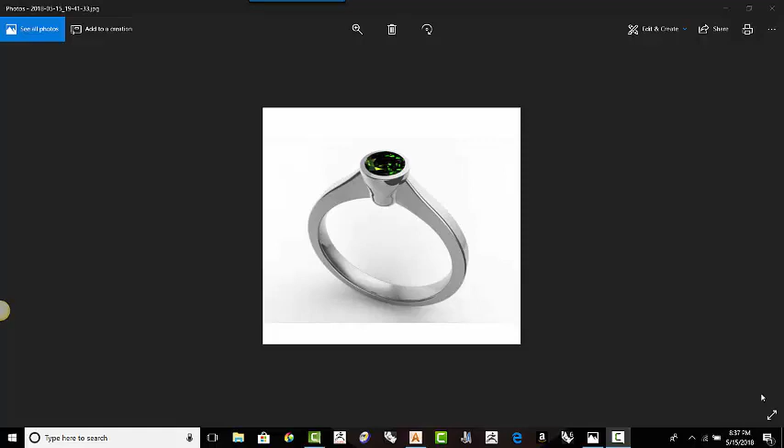Hi Artcam users, so I'm going to do this quick tutorial showing you how to export Artcams out of Rhino and how you can use Rhino as the sweep tool yet keep Artcam as the vector drawing tool, because I know for those who start learning Rhino the drawing tools are very daunting and it takes a while to learn them. Eventually you will stop using Artcam drawing tools and you will stay in Rhino.

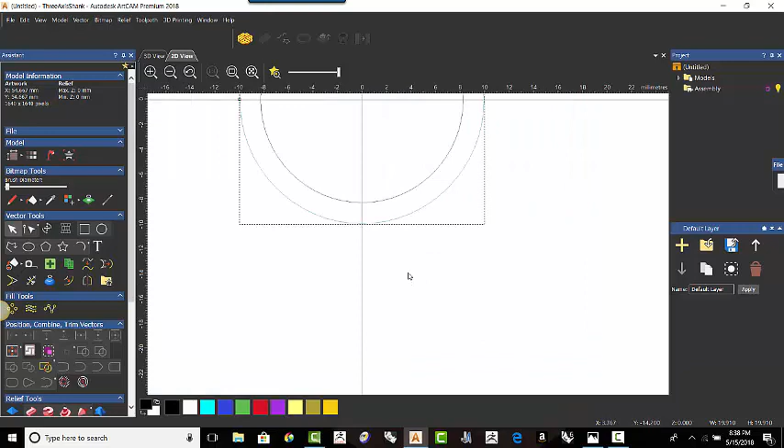So in the meantime, to help you, let's go ahead and create this ring inside Artcam. So let's go to a new project and we're going to go to a three axis shank from the side, this one here, create a three axis shank, size 6 is fine. The bottom of the shank I want to be 1.7 and let's accept that. Alright, so the distance between these two lines here are 1.7, which is fine.

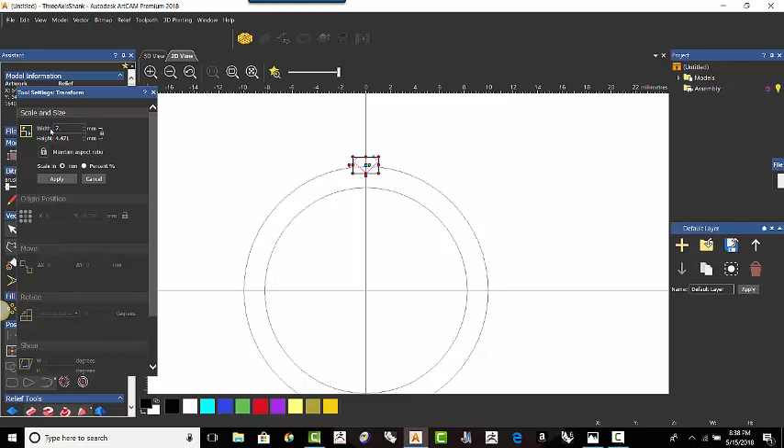I'm just going to quickly bring up a diamond shape that I have. And I'm going to go to T for transform. And keeping them locked, I'm going to enter a width of 7.5. Apply, cancel. Alright. Using the up arrow, I just get it to the position that I want it to be. Alright, so now we need to start to draw the bezel that goes around the stone, and then we'll do the shank.

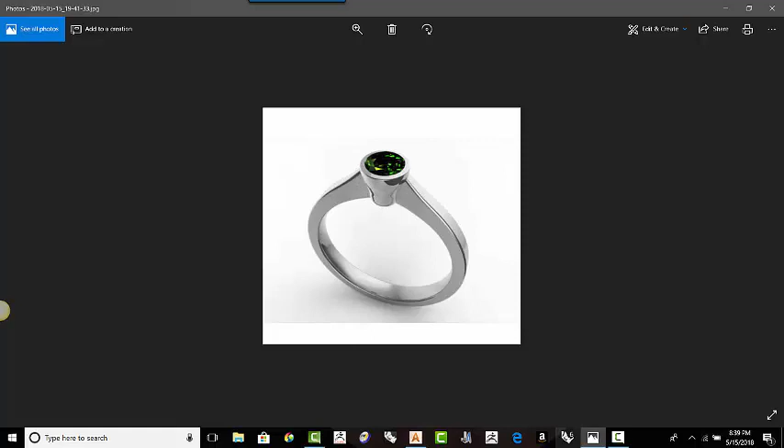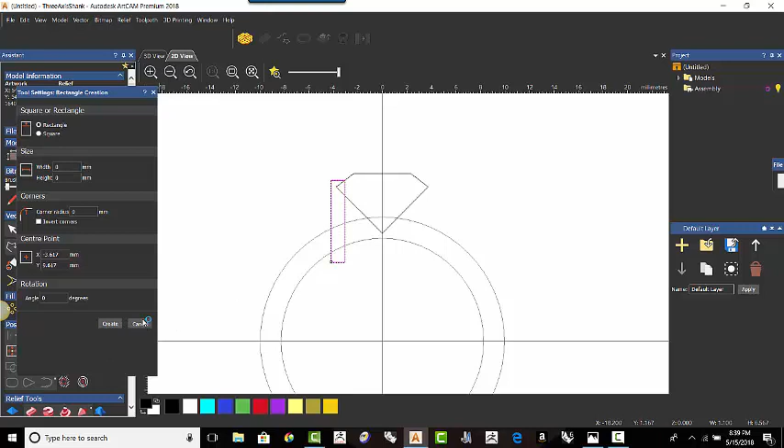Alright, so to draw the bezel, we're just going to draw a square, the thickest you want the bezel to be. Let's make the bezel 1.1 thick. Create. And then I'm going to transform the angle that I want it to be, and I'm just going to move it using the arrow keys into its position.

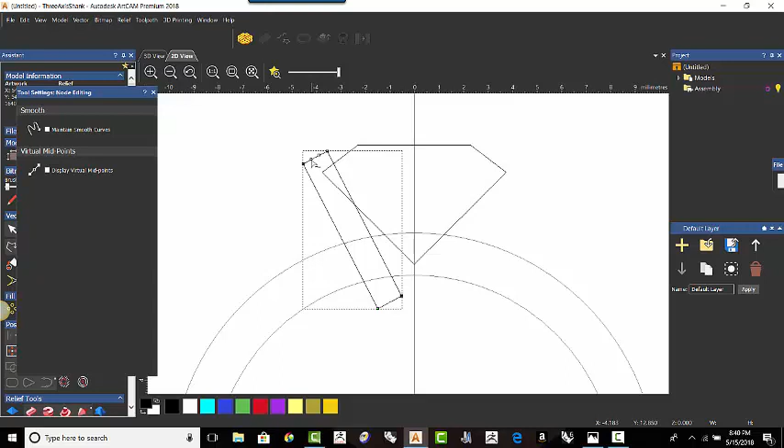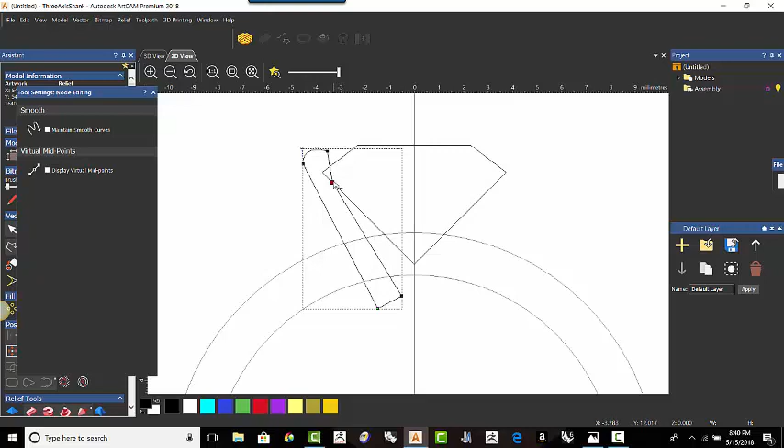Alright, so let's go into node editing and let's turn this to a bezier. Let's just give it a little bit of style, and that should be fine as a bezel, although you can insert a point here. You can just bring this point just a little bit in like that. Alright, so there's a bezel that will hold the center stone. The bezel needs to be longer than the actual stone. So that will do a rail revolve all the way around.

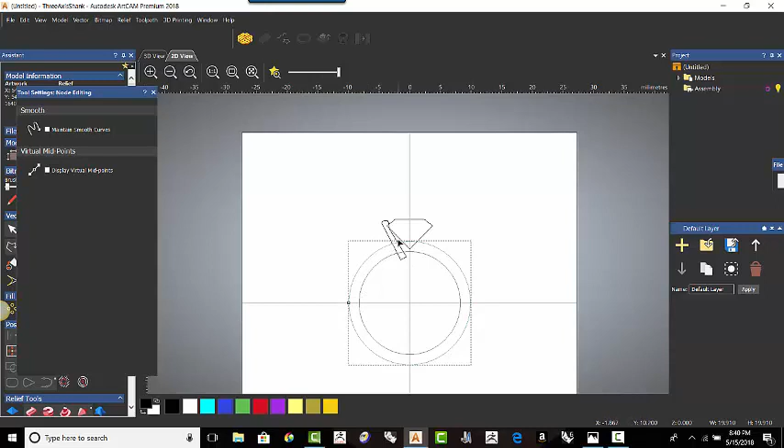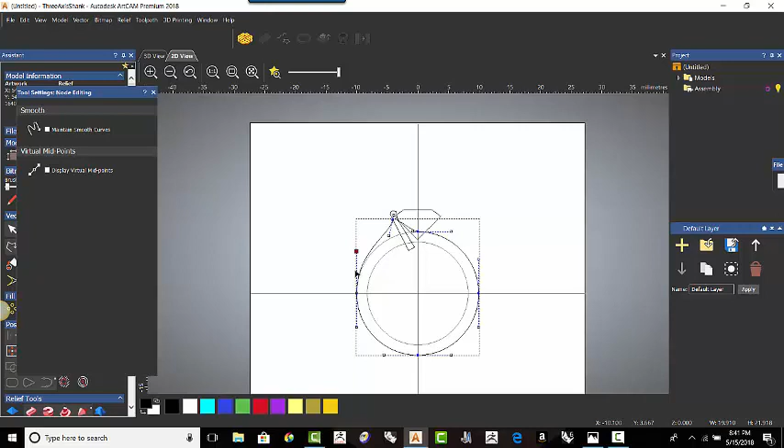So let's draw the vector itself. Let's draw the actual ring shank now. So we can use this, copy paste. We're going to insert a point somewhere around here, just pressing I on the keyboard. Select that and drag it up to the height you want it to be. Get a little bit of a swoop. Press the up arrow and let's say we're happy with that. And let's move this vector there down to there. Let's make this a straight line by pressing L on the keyboard for line.

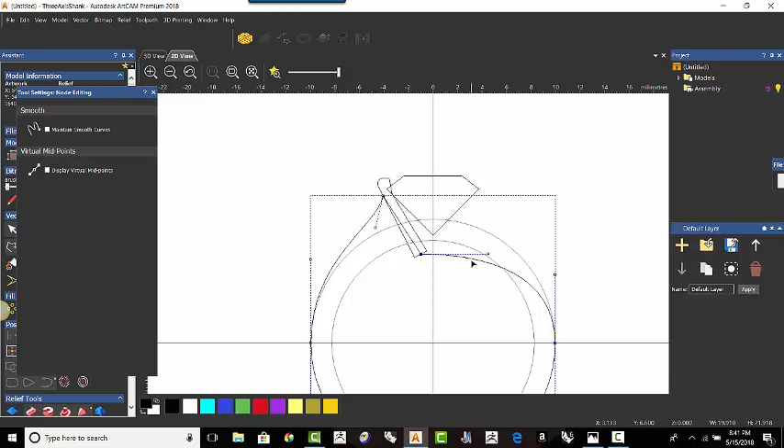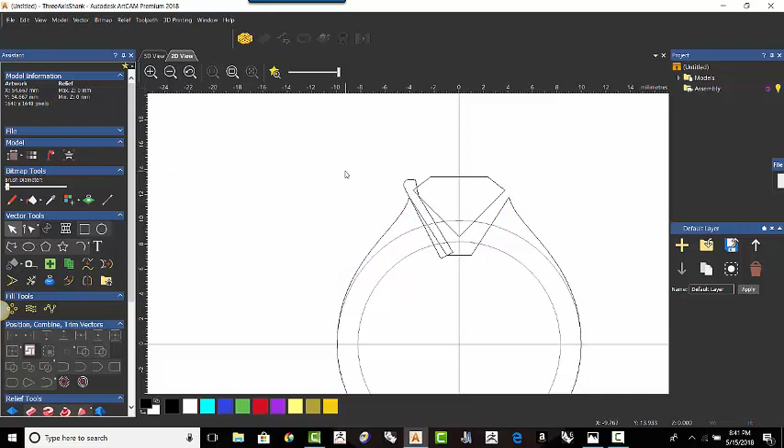And we are almost done. So we're going to remove this section here, highlight with the mouse, press R again, bring up the vector mirror tools and go right. Last but not least, let's join these. So let's close vectors with a line, so that's a complete drawing. Okay, so last but not least, that is touching that, that's good.

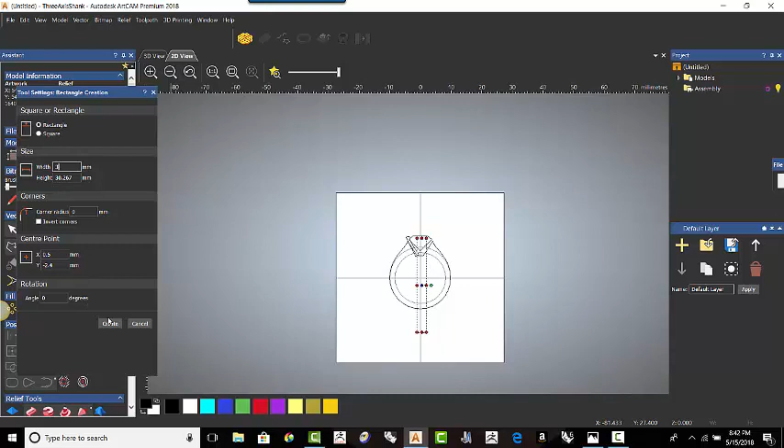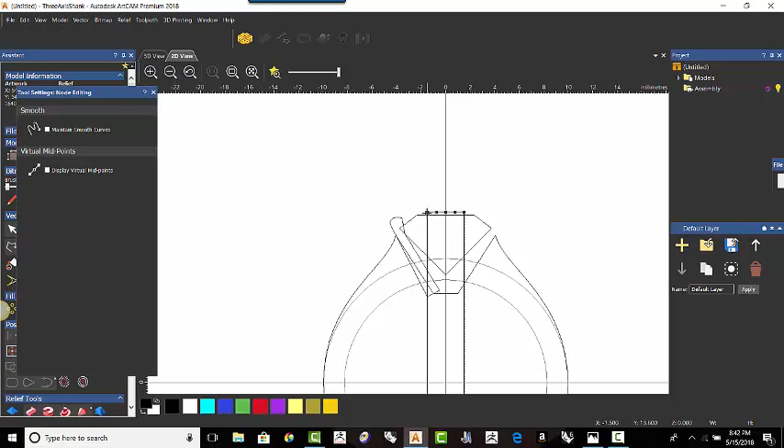So now let's draw a shank. Let's say the shank is going to be 3 millimeters wide. Create, close, and F9 will put it in the center, and the arrow keys will bring it down, and then let's just insert a midpoint. Mid, pressing M on the keyboard, mid, mid and delete the ends. Delete that end, delete that end. Okay, so we've got a tapered shank.

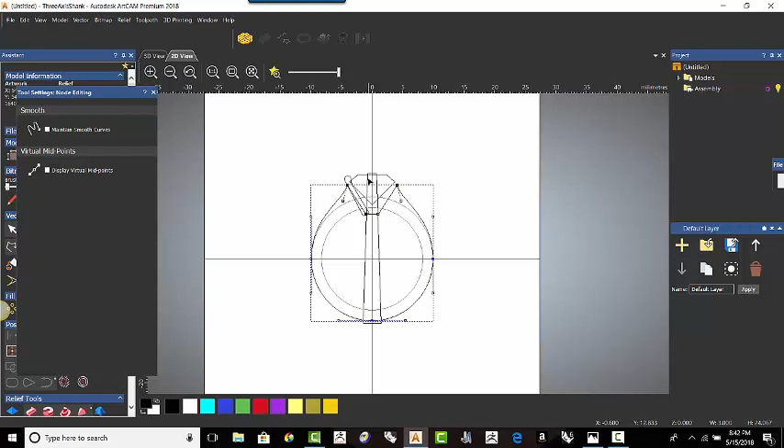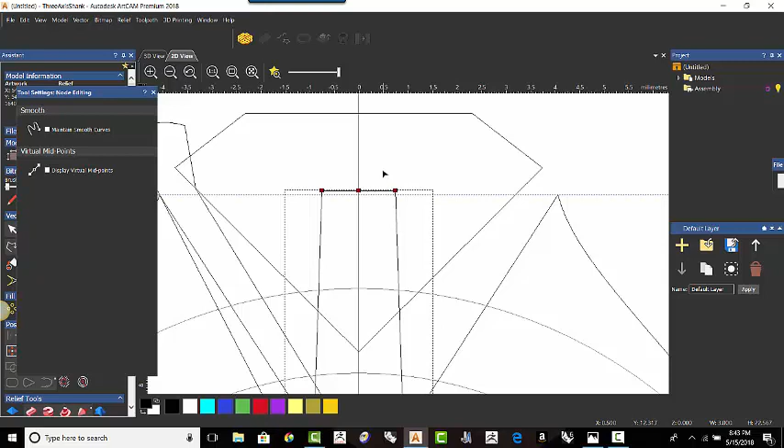Use the up arrows. Alright, so this is what the tapered shank from the side view would look like. That's just this shank here. Oops, this is a bit high here, so let's grab this and bring it down so it's more in height of this area here. Bring it down a little bit more. Alright, so that's slightly higher than this here. To get a little bit more accurate, bring down a guideline, and alright, it needs to be just slightly higher than the shank.

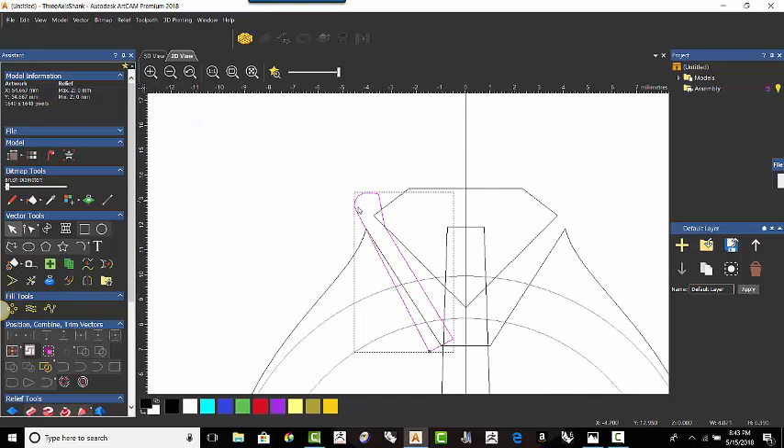Alright, so this is all the vectors we really need. Okay, we've got the taper of our shank, we've got the shape of our shank, and we've got the bezel. Okay, here's the bezel. Alright, so we're going to export these. We're just going to draw a large circle around the outside. Make sure you press F9 to put it in the center. And then we're going to select, copy paste the inside vector. So we've got a ring finger size hole.

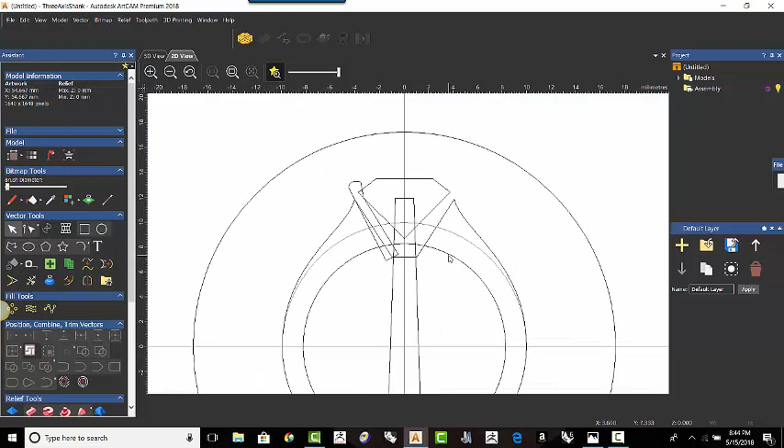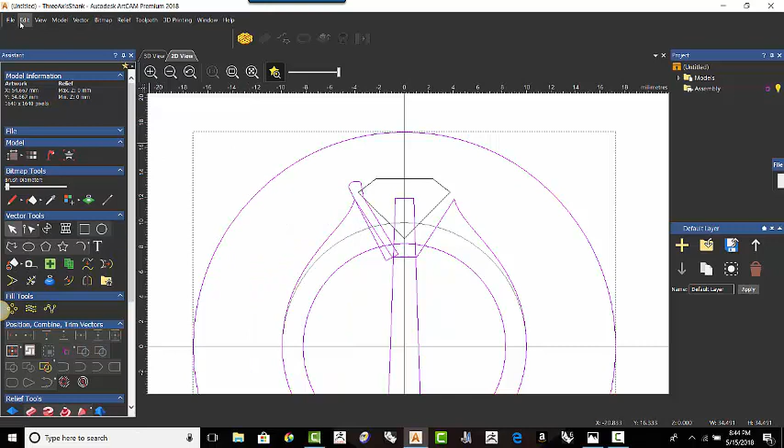Alright, so we need the ring finger size hole, shift, the shank, the bezel, the tapered shank, and the outside circle. You can group them all together. Right click group, and now you can go vector, export EPS, ring 1 EPS, save it.

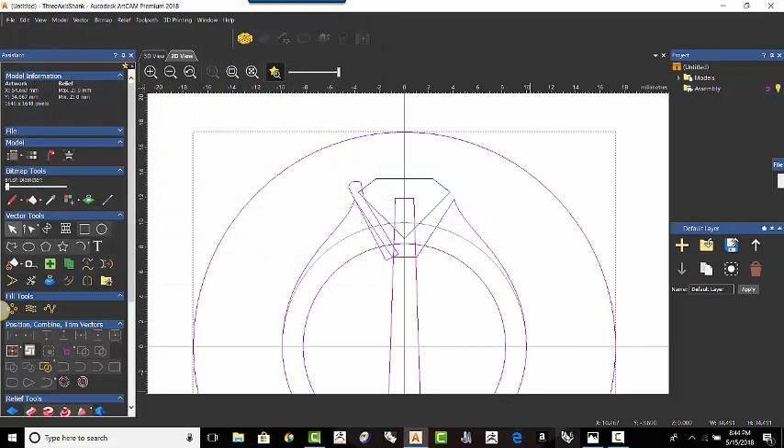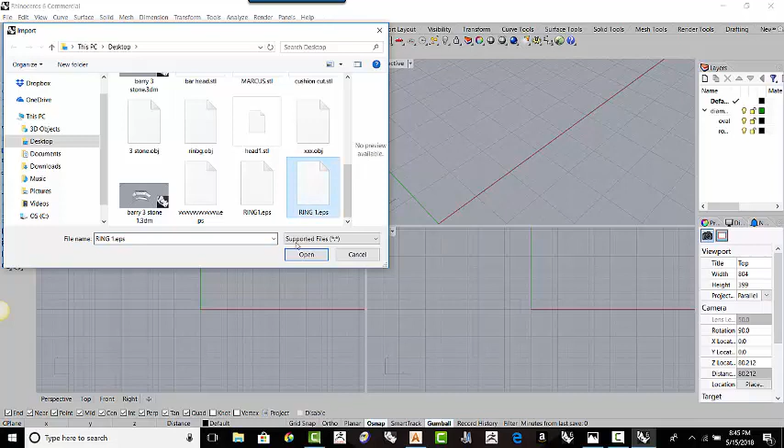Alright, from here we go into Rhino now. We finished the drawing in Artcam, and we can go into a new... stones we do not need, so I'm going to delete them in this case. I'm going to go File, Import, Ring 1, Import. 1 inch in PDF is 1 Rhino unit is good.

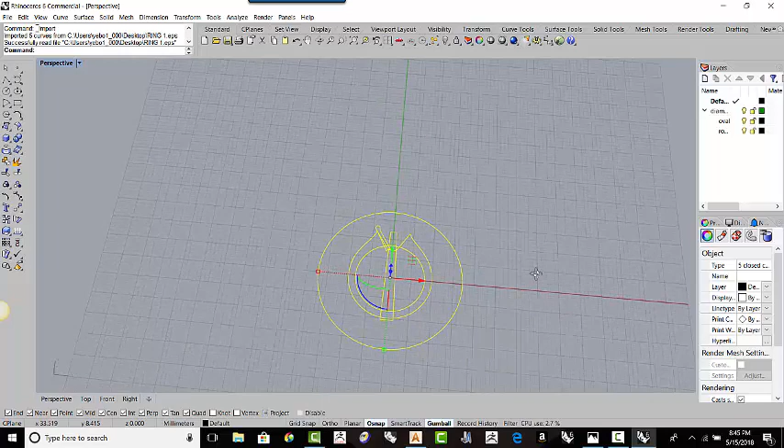Go to the perspective view. So the difference between Artcam and Rhino is the green arrow is the ring finger hole and the red arrow is not. That's basically the only difference. So if the green is the ring finger hole, we need to rotate it. This whole thing has to rotate anti-clockwise. This is the axis we need to rotate around. So we click this axis, enter 90, and press enter.

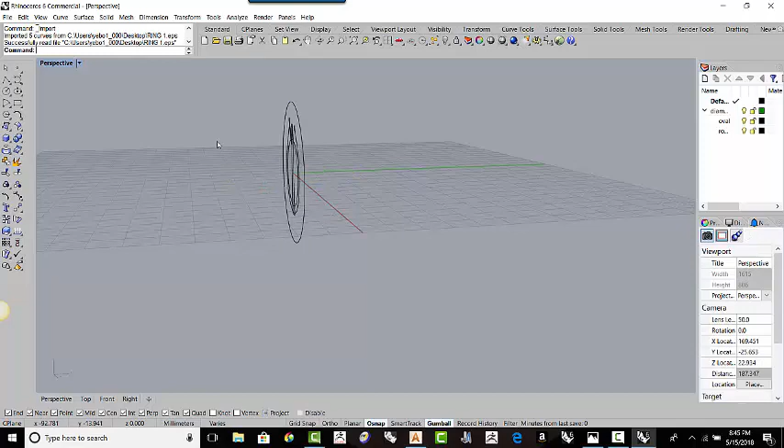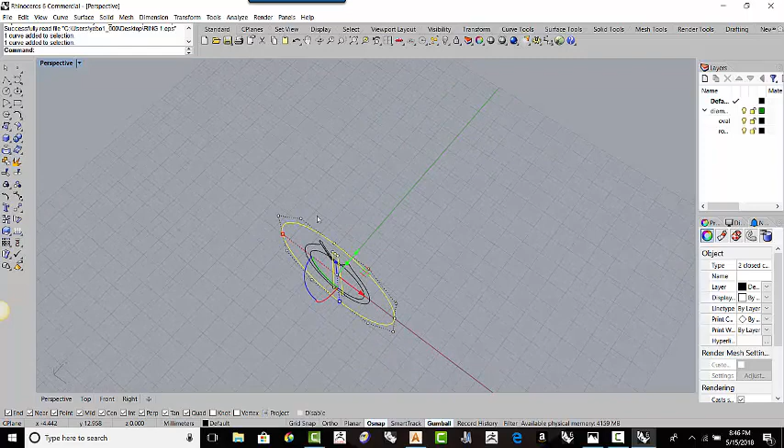Alright, so that's now in its rightful spot. If you go back to perspective, you can see they're starting to line up in the right viewpoints. And go back to perspective, and this needs to turn 90 degrees on itself. So highlighting this and this, we're going to rotate this 90 degrees around the blue. We're going to press enter, and that is in its rightful place. Click the outside circle and delete it.

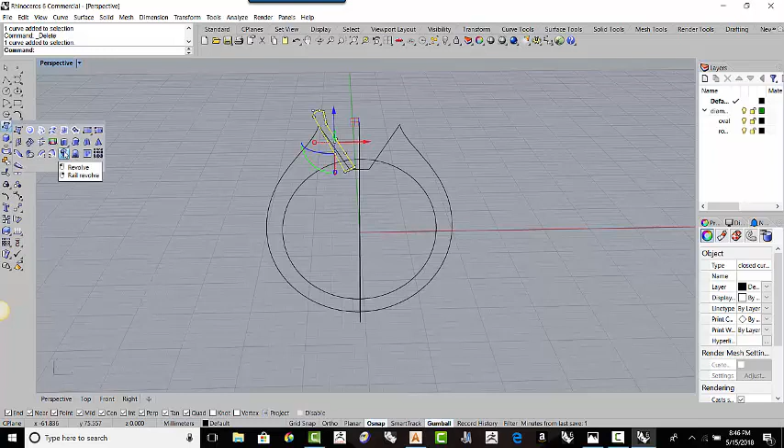Alright, so now we're going to go to rail revolve. So we're going to go to this line, and it sits right here under this icon right there. The revolve tool is right there. So you're going to left click. Start of axis is 0, 0, 0. So I'm going to enter 0 on the keyboard, type 0 in the command line, and press enter.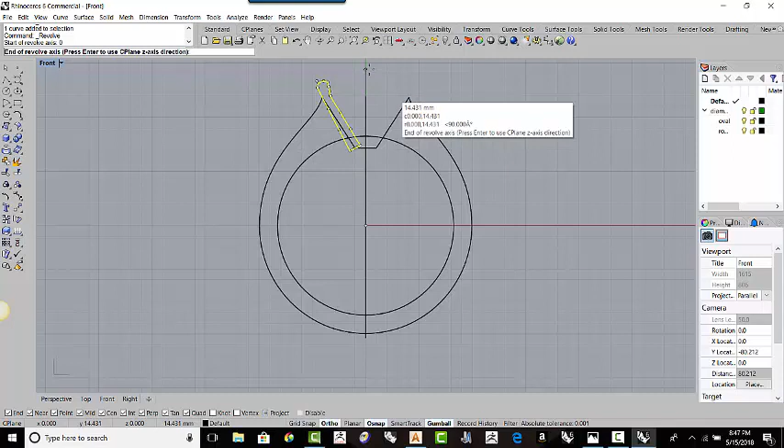Okay. It then says, what axis do you want to go on? I want to go in the right viewpoint. I want to say revolve around this axis here. So it's around this point, holding shift to constrain it. And then I'm going to press enter once and enter twice. Okay, go to view, shaded, and you can see you now have, go back to our perspective view, we now have a bezel.

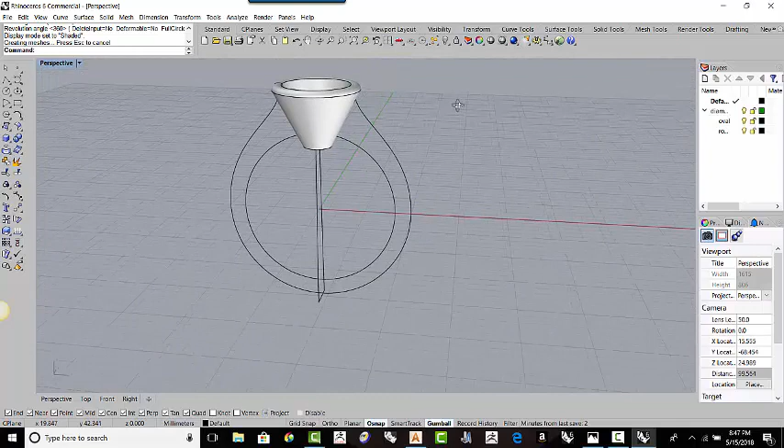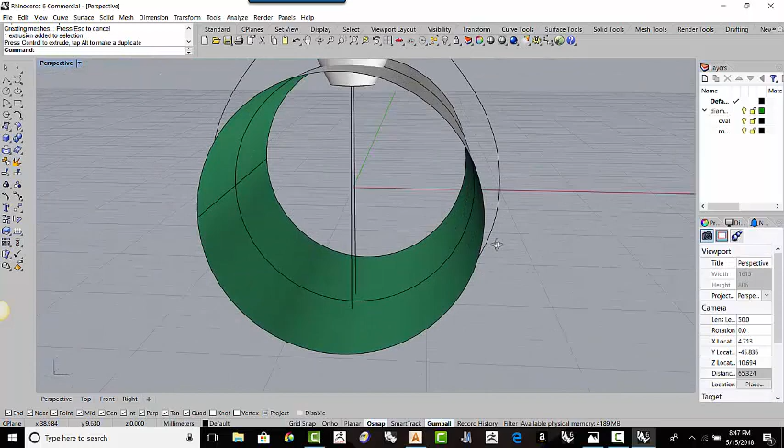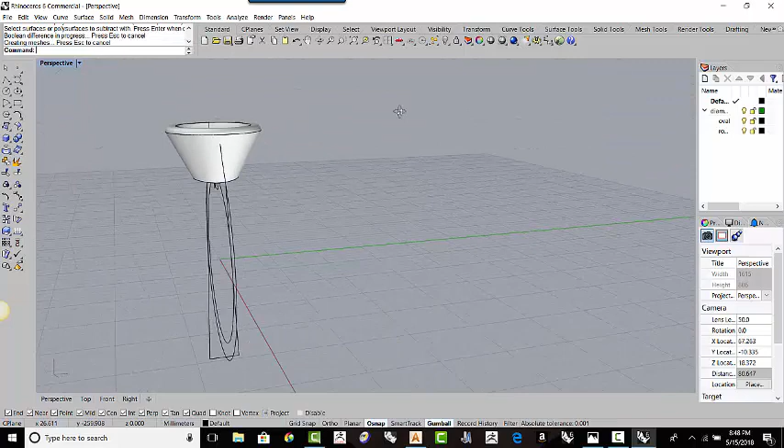Okay, so we're going to trim the bottom of the bezel away. I'm going to highlight the ring rail, and using this little ball in the middle, I'm going to click the ball, drag it out, and highlight this surface, move it in, and now I can use the surface to cut the bottom of this bezel away. So to do that is Boolean difference. I select the part I want to keep, highlight it, press enter, the cutting surface, press enter, and we now have the bezel.

Alright, so now we're going to extrude the shank. So we're going to select that, shift and that. Actually, let's just do the outside because this comes down past the inside. So let's grab the outside and let's go back to this tool. This time we're going to use a different tool. This one right there, extrude straight.

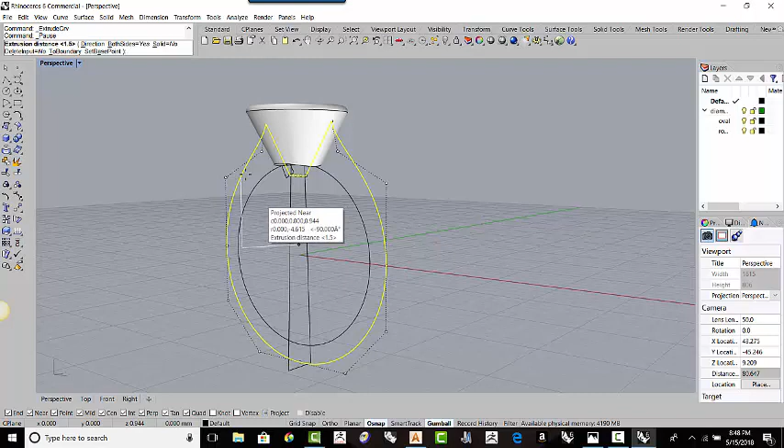Okay, you can see it extrudes straight, but let's look at the command line. It said let's do both sides, yes, but let's make it a solid, yes. And we're going to extrude it both sides. We want it to finish 3. So let's go 1.5. Each side will give us 3. Press enter and we are done.

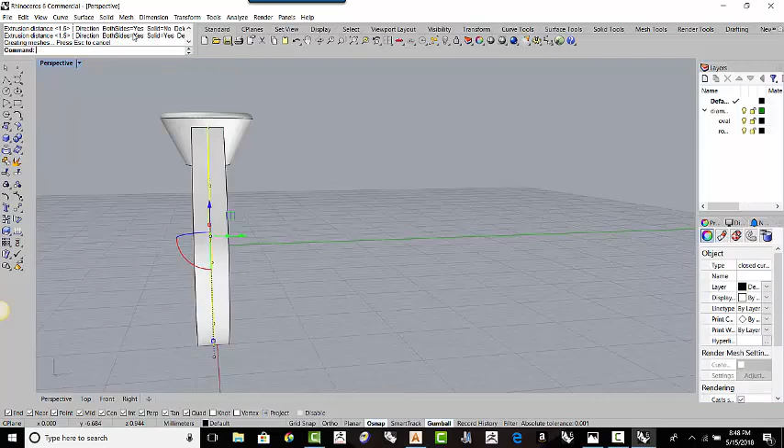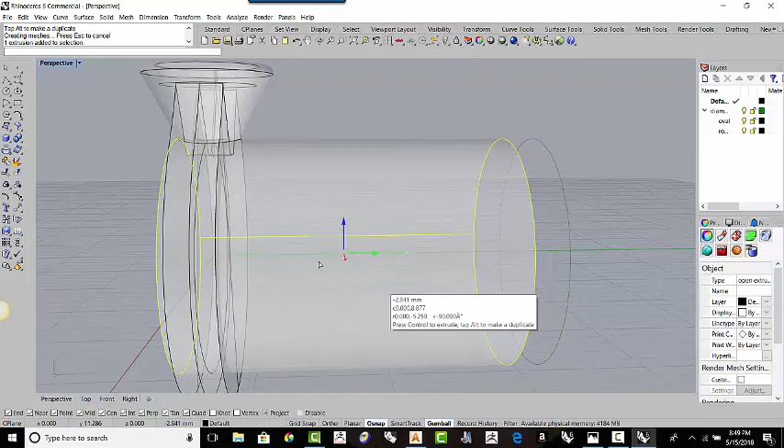Okay, so to see our ring rail, we're going to go to rendered or ghosted. We can now select the ring rail, use the green dot again, extrude it out, grab the surface, extrude it back in again using this green arrow on the end, move it in. Alright, so now we have 2 surfaces. So we're going to go to, once again, Boolean difference. Shank is what we want to keep, highlight it, press enter. Surface we're going to need to cut it away, press enter again.

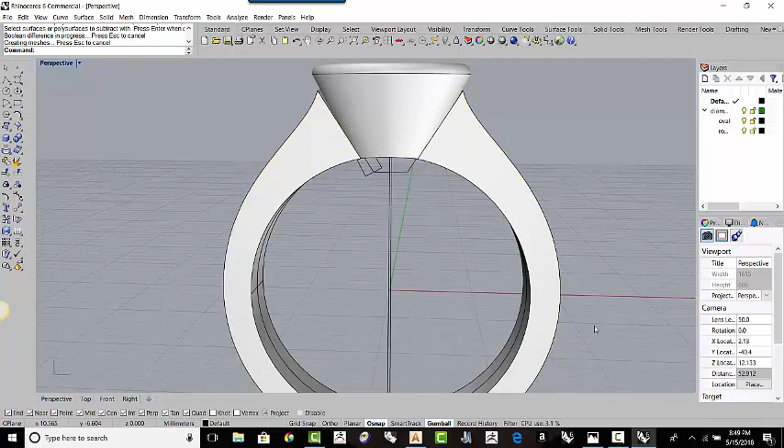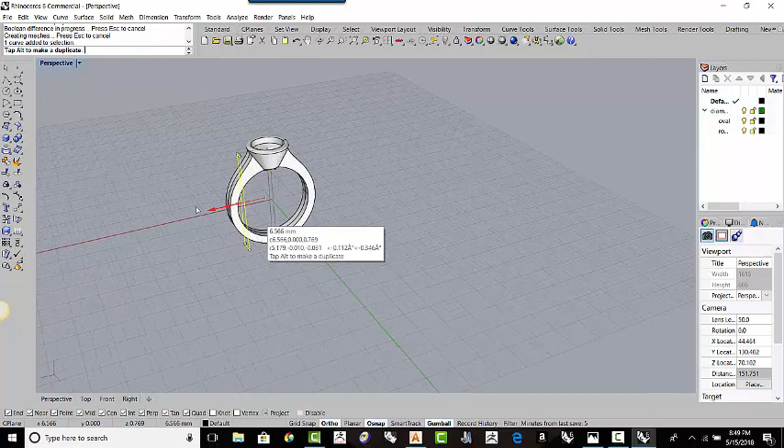Alright, the last thing to do is to take this shape and to cut our shank. So we're going to grab this shape, grab the ball on the arrow, extrude it all the way out. Let's just bring it all the way out. Select it, select the surface, bring it in. Alright, and now we want the intersection of these two. In other words, if you look through this view, we want what's inside the shape to remain.

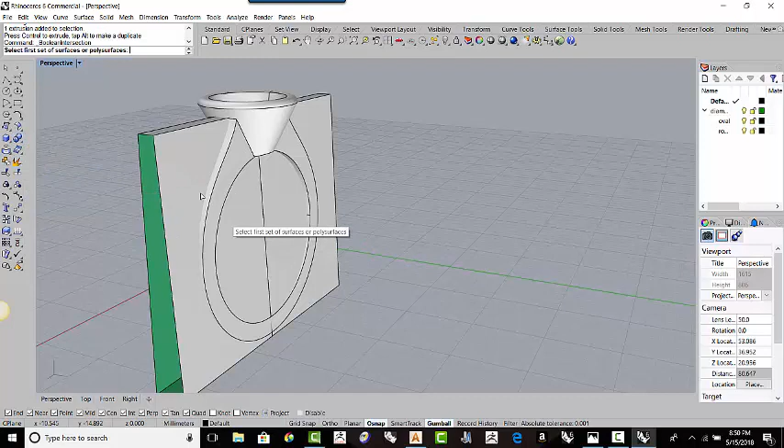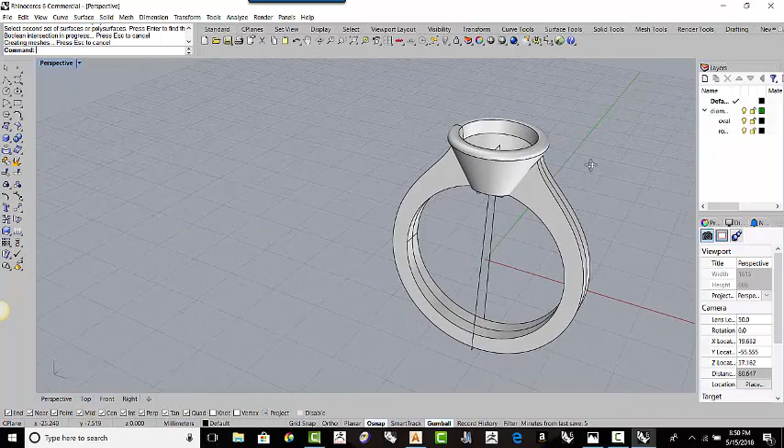So that's the intersection. So Boolean difference or intersection. So you have to select the 2 surfaces. Select the outside surface, press enter. Select the shank, press enter, and now we have the difference from inside. And there we go. So that is how you use Artcam vectors, import them into Rhino, and use Rhino to create smooth sweeps.